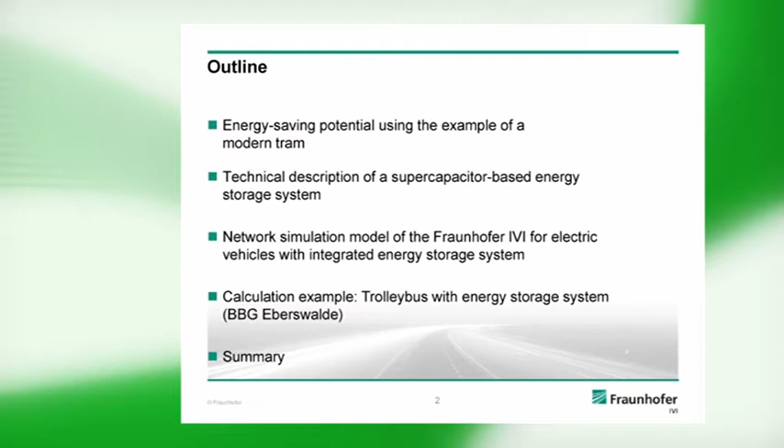In my presentation, I will understand energy saving potential as the ratio of so far unused braking energy to the energy demand of the vehicle. First of all, if you're dealing with the question of increasing the energy efficiency of your tram or trolley network, you have to answer the question: is the potential of unused braking energy in my network high enough? If you answer this question with yes, you have to look at which technology can make the unused braking energy accessible for your process.

And I want to give you some reasons why supercapacitors should be the best solution for this case. And then, if you have defined the energy storage system, you can use a network simulation to make a better calculation. The network simulation is very expensive in cost and extensive in time, so you have to think about it before you do something like this.

Let us take a closer look at the received results. I have tried to classify our measurement results for a better overview and to make clear the main influence factors. On the one hand, you'll find results subdivided into groups of ambient temperature: for summer operation I chose above 15 degrees centigrade, and for winter operation below 5 degrees. The subdivision into urban center and suburban area is a bit subjective, because there is no real border between suburban area and urban center.

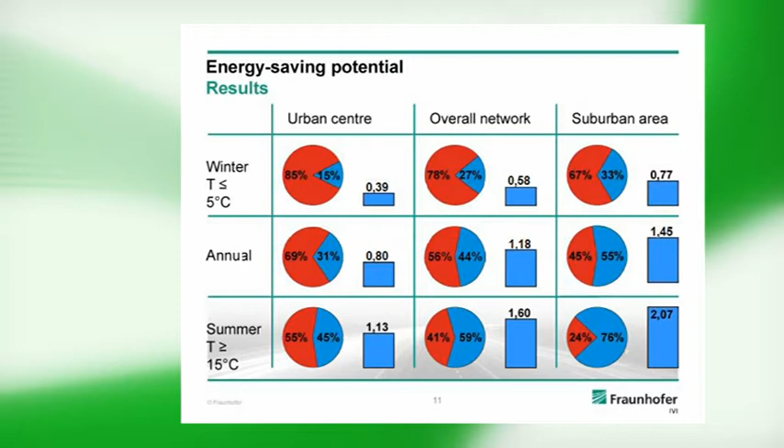If you meet a manufacturer of energy saving systems, he will show you this amount in the right corner. And an infrastructure specialist who might be thinking about energy saving systems would take a look on the left, at the circle in the winter urban center. But the only result the tradesman of a transport company will be dealing with is the average over the whole network and the whole year, in the middle of the diagram.

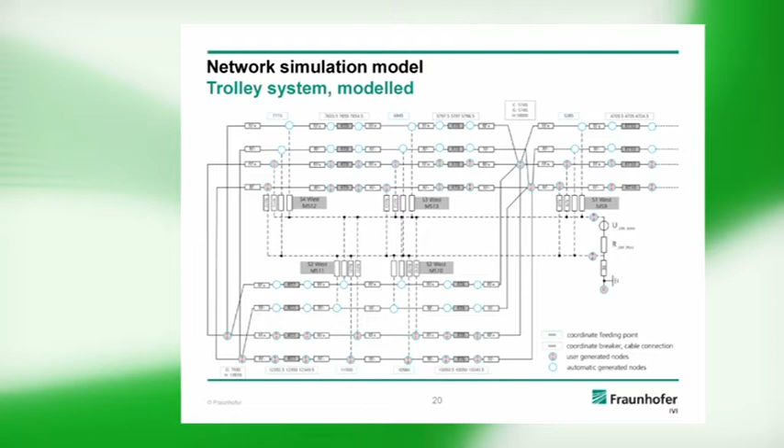And now you can find all you need: the substation, input leads, input cables, breakers, couplings, and all of the components have defined nodes in the network and a specified local position as well. All cable lengths are represented by transfer resistances. You can imagine how much effort it takes to create such a network, even in this case of a very little network. That's why you have to think very carefully about whether you need such a simulation or not.

To repeat, in summary: if you want an answer to the question of whether the energy potential of so far unused braking energy is worthwhile in your electrical network, I would prefer measurement and data processing.

The other two requests I want to bring closer to you are shown in front of you, which means for economic utilization of available braking energy for decreasing the energy demand, a custom-designed dimensioning of energy storage components and power electronics is required. An appropriate base for the decision process for the track- and fleet-specific purchase of energy storage systems can be worked out by network simulations. That can be done for stationary or mobile energy storage systems as well.

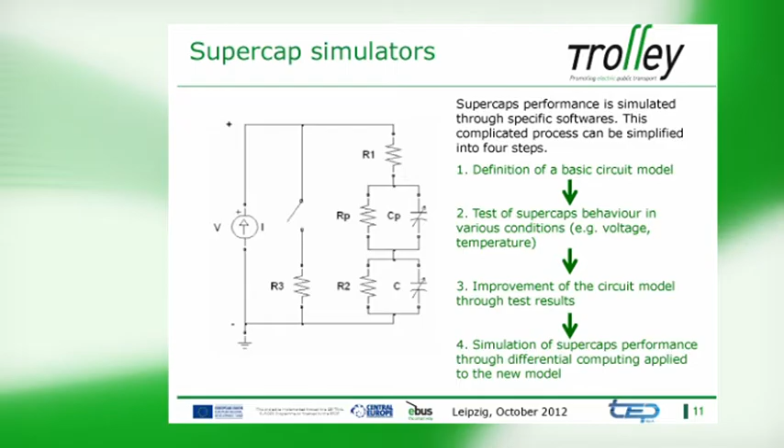First of all, we have to define a basic circuit model. This one is really easy. We see the voltage source, some resistors, and this C represents our supercap system with its internal resistor. The CP and RP represent the secondary effects of the operation of the supercap. This basic model is useless for significant computing, so tests have to be done on supercaps to identify their behavior, for example, in different conditions of voltage and temperature. And once these tests have been done for a specific model of supercap modules, the circuit is improved in order to be solved to get reliable test results.

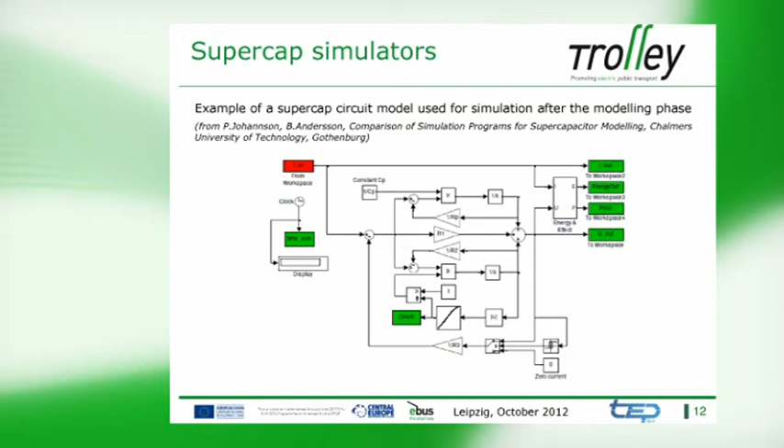This is only to show you an example of how complex a refined model for computing the supercap's behavior can be. Usually specific software is required for the solution of this model, but what we achieve with these models is quite a reliable forecast of the behavior of supercaps in operation. And then comes the most interesting thing.

We finally install our supercaps on the trolley buses and put them in operation. Also for on-road tests, as the one conducted both for Milan and Parma trolley buses before official service. On every trolley bus is installed a diagnostic help unit that gives a very detailed report on the behavior of the supercap system. This is not only done in tests, but also in everyday operation.

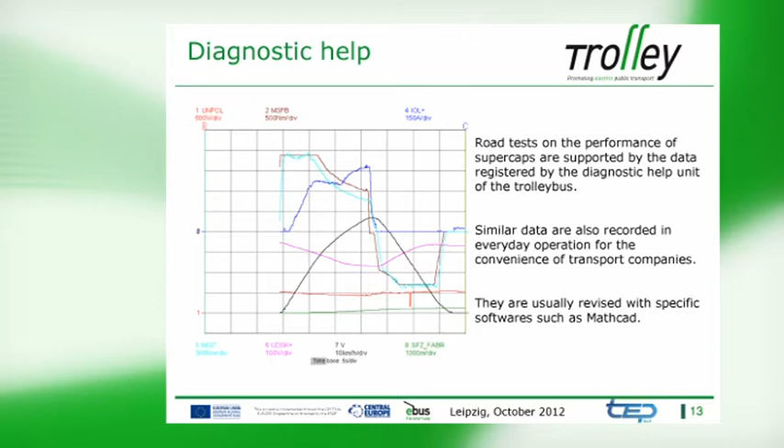For example, the Van Hool trolley buses of Parma will enable us to know the most important data at 5 intermediate points between each stop. So TEP will be enabled to collect quite a good amount of data and perhaps work on how to improve the driving conduct of the drivers, or the layout of the intersection in some points of the city to make the supercap technology even more effective. We will see whether this will be possible in the future.

The result of these diagnostic recordings are such graphs, and as the last thing I would like just to show you one of these. Please consider this black curve. This is the speed. This is our point of view to understand the behavior of the supercaps. Here we are in the speeding up phase, and we see that there is a steep increase in the blue curve as the current taken from the overhead line, but also a decrease of the supercap voltage, that is the purple line, because the supercap is providing its energy to the traction unit.

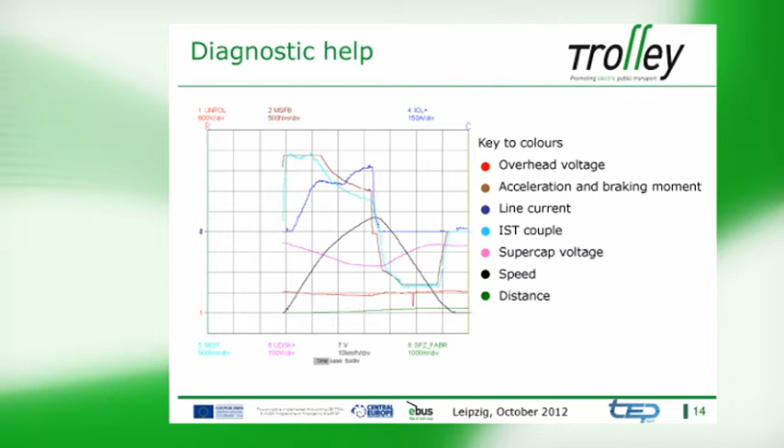As long as the trolleybus starts slowing down, the supercap voltage increases again as it is actually charged. And another interesting thing to see is the red curve, because that represents the overhead voltage. There is a steep and sudden drop in this part. This is probably because the trolleybus is passing under a neutral section. But we can see that nothing is modified in the behavior of supercaps, as there are no deviations in the purple curve. This means that supercap operation is not influenced by the presence of neutral sections.

On the contrary, they can cooperate to avoid the negative effects of neutral sections, as they are able to store energy, and on the reverse side to provide energy to continue the operation of the units when they're moving. And this might be really useful, not that much in Parma, as we have not too long neutral sections, but in other cities. An Italian example is Bologna, where for drivers it is quite difficult to go through these long neutral sections placed at busy intersections. And the supercaps will reduce as well the risk of getting stuck with the trolleybus in the middle of the intersection in peak hours.

So this was my overview.

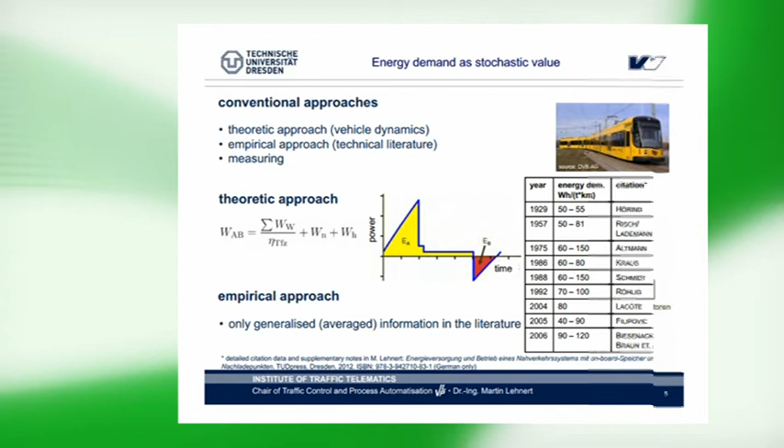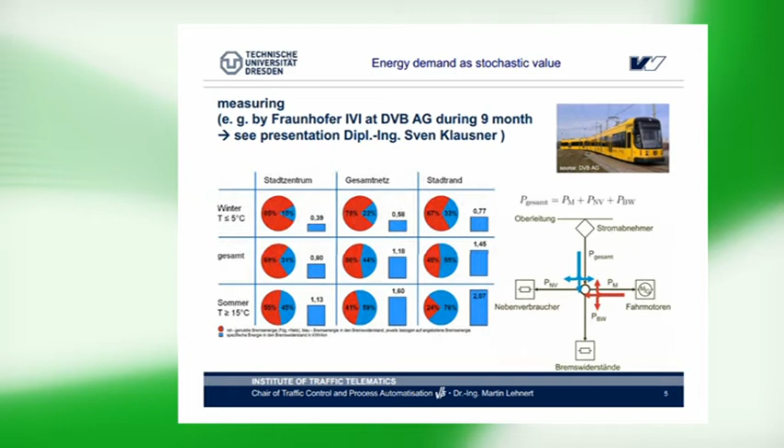Well, the next one is the empirical approach. Empirical approach, this means having a look to the literature, what is given there for figures. And you normally get average information, generalized data, which is also a conventional approach. And the third approach, you might have seen this figure, now it's in German, but you have seen it in English in the last presentation by Mr. Klausner. There you can make measurements, Fraunhofer IVI did that, and get these results. I won't focus on that, you have already heard.

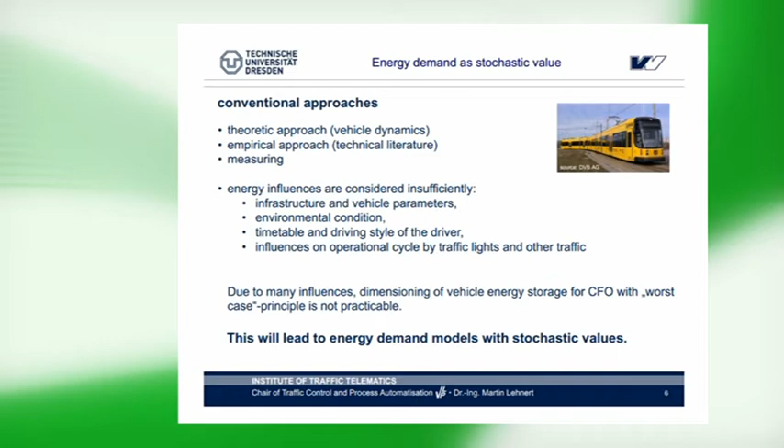Well, all these approaches have one important disadvantage, because they don't consider the many influencing factors in total. So these are the influencing factors for infrastructure and vehicle parameters, like the topology of the network, like the auxiliary power demand, these are environmental conditions, like extra energy demand for heating, etc. These are also timetable and driving style of the driver. We also have heard it in the presentation before, as well as the influences on operation cycle by traffic lights and other traffic. And this is very important because every additional stop needs a very huge amount of additional energy.

So I believe that not only buses, but also trams, not only trolleybuses, but also large-sized trolleybuses can be operated by such a CFO system with onboard storage system and recharging points, if the development of energy storage technology goes on like in the last years. Then it will be feasible to operate bigger vehicles like trams and big trolleybuses.

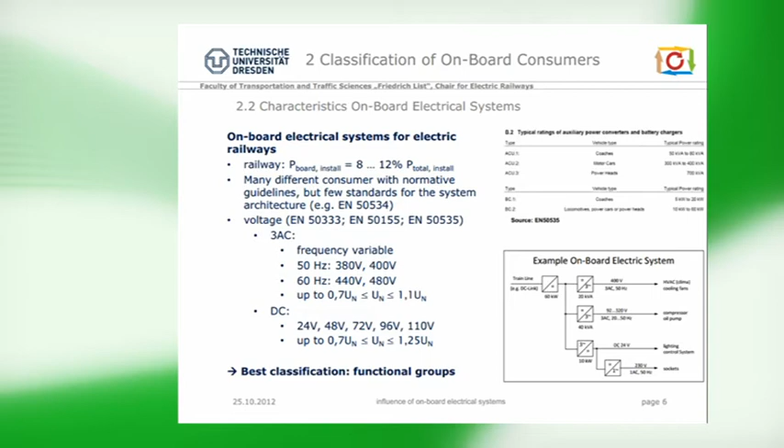You can see here that some standards define power ratings. For example, I think you can't see it: for coaches, we've got 50 to 60 kVA; for motor cars, 300 to 400 kVA; and for power heads, 700 kVA.

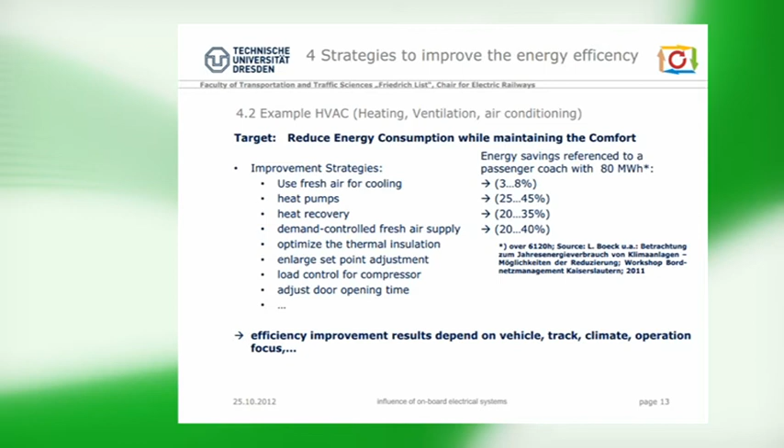One example I want to show you for energy savings refers to a passenger coach I found in the literature. You can see fresh air cooling, opening the window, makes 3 to 8%, and as you can see here, heat pumps are the most efficient possibility. Heat recovery and demand-controlled fresh air supply are also between 20 and 40%.

I have to say that this is only one case under many conditions, so you can't say the results are always the same. The results often depend on the vehicle, the topology, the track, the climate, the operation focus, and so on. So this is only one example for this coach.

For the efficiency improvement of the onboard electrical system, you've got a lot of different options at the system level, in the functional groups, and at the unit level, and there is an interaction between all these groups. You have to check the necessity of standard set points in operation, for example, and the results of your efficiency improvement depend on many different conditions, as I told you.

Further interesting fields are that we've got a variety of goods. We have a lot of types of network configuration in voltage, function, and size, and a lot of different electrical vehicles with similar electric structures. Trolleybuses, trams, trains, and e-cars sometimes have similar structures.